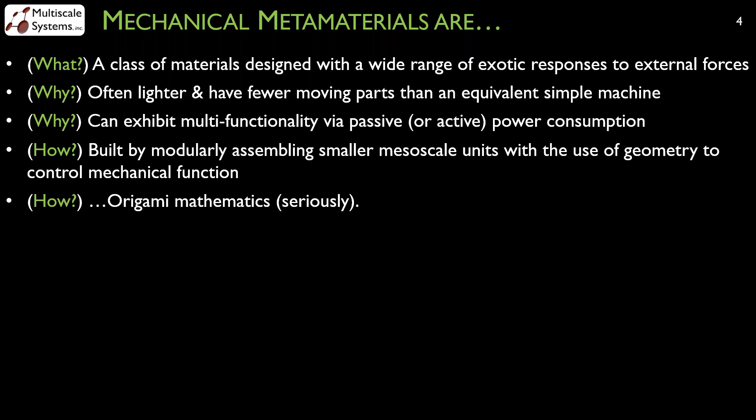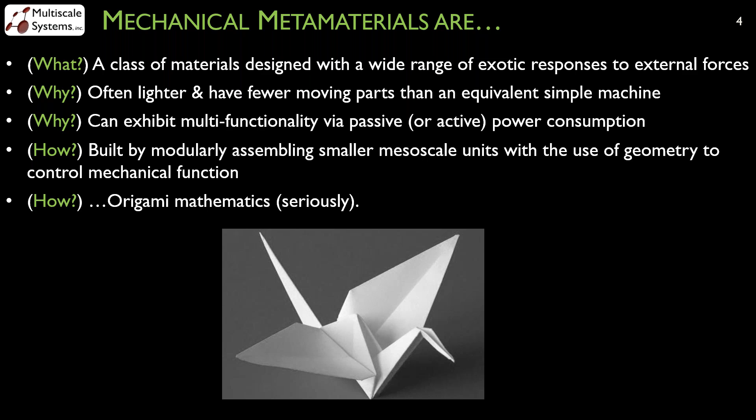Origami art like this is actually possible today because in the 80s and 90s, a group of mathematicians, computer scientists, and physicists took an interest in the mathematics of origami and developed tools to enhance its design. That community also helped lay down the foundations and the tools for being able to probe how origami can be used to control the mechanical function of folded sheets.

And this is a really nice entry point into the world of origami as a mathematical object and a building block for materials, because this simple design is incredibly rich with technical insights.

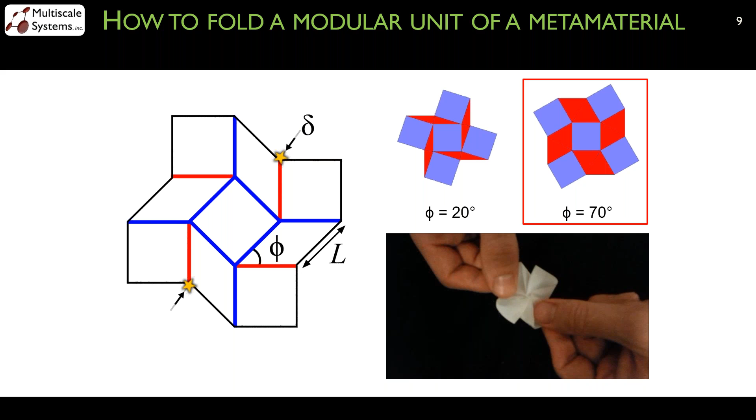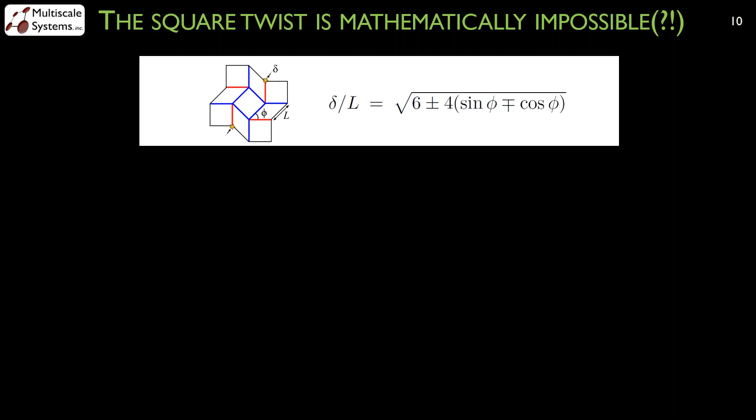Mathematically, there's a really bizarre mystery that shows up as soon as you start to try and analyze this, and it turns out that mathematically this thing is impossible, that it shouldn't exist. So I've written down a formula here. I don't expect that it'll mean a lot, but basically it comes down to this. You can calculate what this square twist should be as you vary one of the parameters.

The reason is that geometry of a crease pattern isn't the only thing that matters if you care about origami. Specifically, let me pause this video. You can play it again. So here you can see that square twist. I paused it, and you can see that right here, the paper is bending. And bending paper does not show up in the geometry of the folding pattern, but it does show up as a property of the paper.

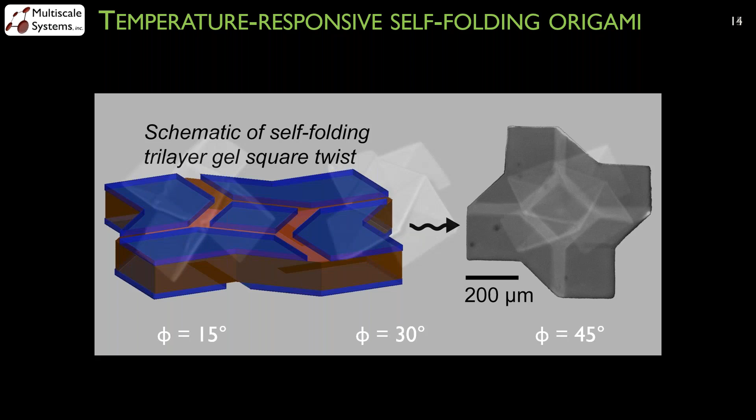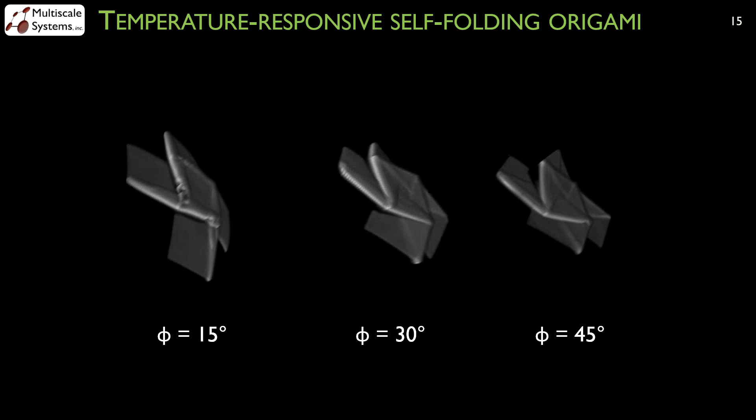So the tip of a ballpoint pen is the size of this origami structure. What I'm showing you here is that we took those self-folding structures with different angles, just like the paper ones I showed you on the previous slides. We put them on a microscope and we did three-dimensional imaging of them just to make sure that these microscopic structures were doing what we think they should be doing. And then we did the measurements.

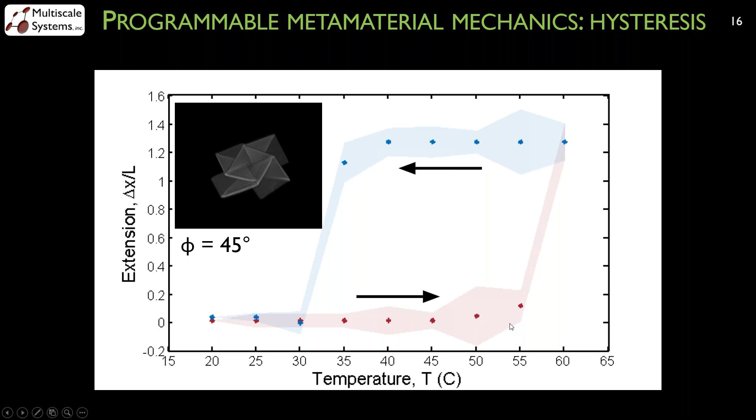So I don't want to spend a lot of time going on what the specifics of this are, but essentially in this experiment, instead of pulling on it with a force, we heat it up, and the heating gives this curve, this red band, that as you heat it up and up and up, it stays kind of folded and folded and folded, and then it hits a critical temperature and pop, the thing unfolds. Then we cool it down, and as it cools down, down, down, snap, it folds back up.

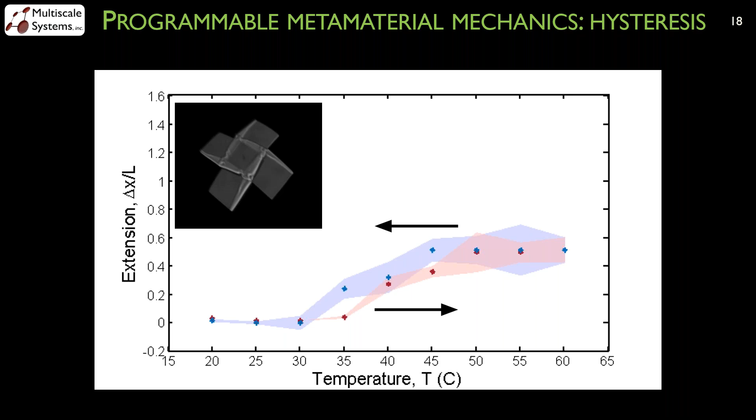We can vary the angle just like we did before, and we can change the amount of that popping action, the size of that loop. And we can put all the data together. And what matters here is that our hypothesis ends up being confirmed. That yes, in fact, we do understand the interplay between the geometry that we've embedded in the material and the properties of the material itself.

And when you sit back and you stare at a blank wall for the better part of a day, what you realize, the lesson that comes out of this is that size doesn't matter. That if you're going to use geometry to make mechanical metamaterials, you can make them microscopically small, or you can make them as big as a solar panel on a space station. And at the end of the day, geometry does not care. It does not care. That as you go up and down in scale, you can engineer the metamaterial properties independent of what size of the structure you're working on.

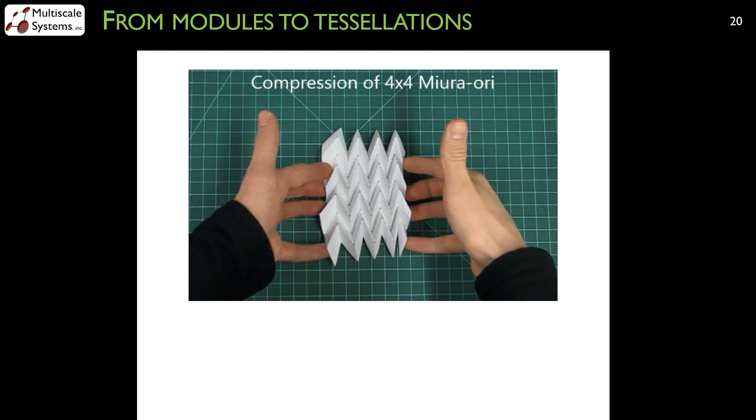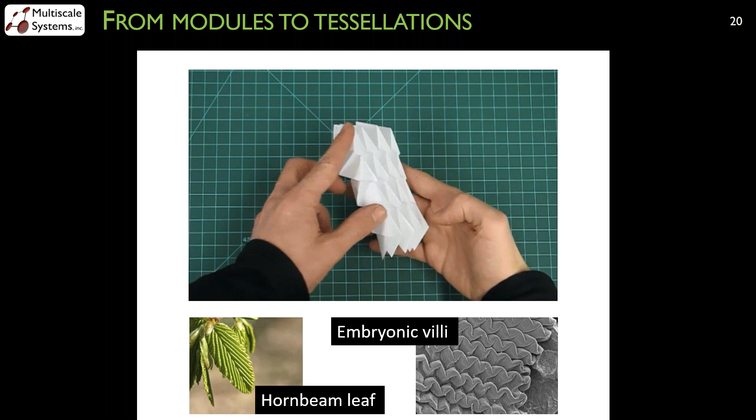So that ends up being important because it's not sufficient to just do one structure. At the end of the day, you want to start doing tessellations, because tessellations give you sheets, and sheets become the building blocks of other structures, other materials. So here what I'm showing you in this video is a pattern. This pattern is called the Miura-Ori. It was invented by a Japanese astrophysicist who was also an origami artist. And he invented this pattern as a way to compactly fold up solar panels to put them up into space for satellites.

The pattern itself is inspired by patterns that we see in nature on leaves, or in this case, embryonic villi, which is just a nice way to say the inside of your intestines as you are going through development. So this microscopic image here is actually the inside of an embryonic intestine. But nevertheless, again, that pattern shows up everywhere. And again, geometry doesn't care about size.

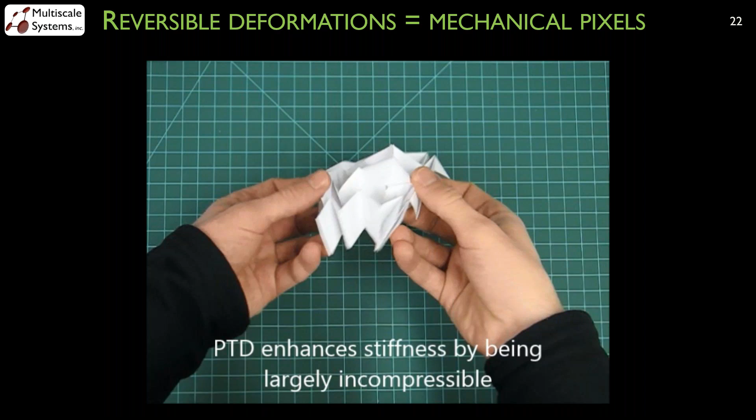One of the really surprising things that comes out of this is that you can make one of these patterns, fabricate the sample, and then you can start to actually modify or augment its properties even after it's been created. So here what I've done is I popped one of the units, I've inverted it, and now when I try to squeeze it, you see that it does not collapse all the way anymore. So by introducing one of those, what we call pop-through defects or PTDs, that allows us to enhance the stiffness of this material as if it was a sort of mechanical pixel. Not only that, the introduction of these mechanical pixels is reversible. So you can add them and you can remove them.

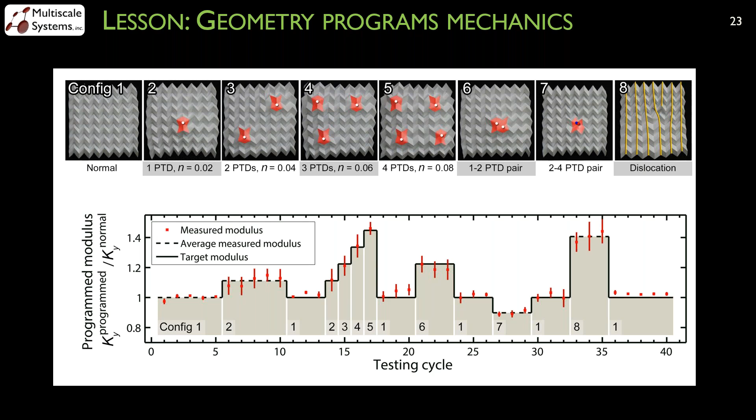So this basically ends up being sort of a capstone of when we go from exploratory science to rational design. And each one of these images here could be a 45-minute technical talk to an academic audience. But needless to say, we started off doing exploratory science, trying to understand this connection between geometry and mechanics.

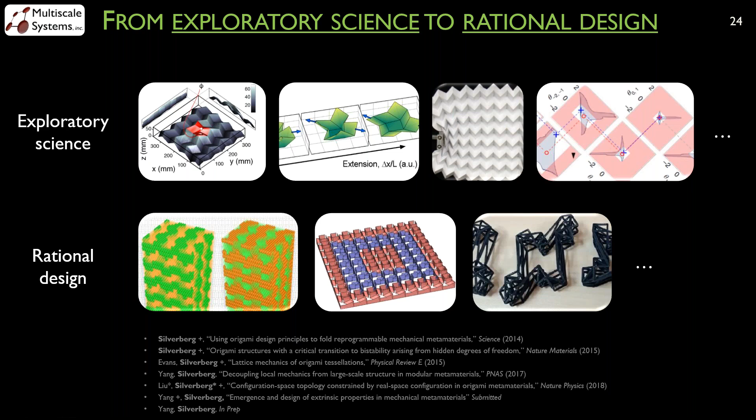We've been successful in there, and we've now gotten to the point where we can do computationally generated structured materials. These structures are three-dimensional. They're no longer just bare origami. There's a lot more technical sophistication that goes into the design, the validation, the fabrication of things like this.

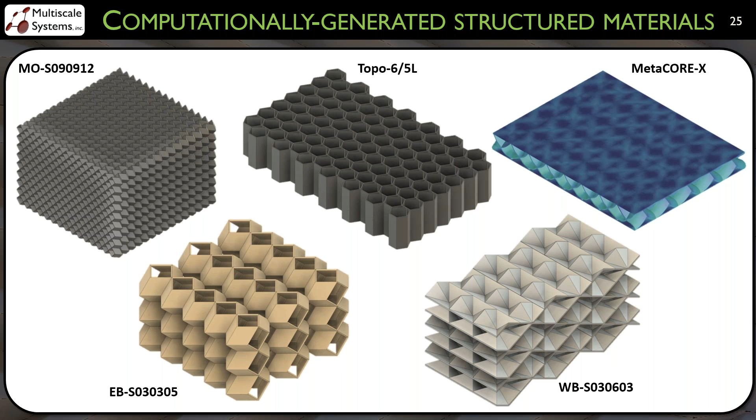But when I say these are mechanical metamaterials inspired by origami, I hope you can think all the way back to the origami crane at the roots of origami and just these basic individual units and poking and prodding them to understand how the crease pattern, how the geometry starts to affect the physical properties. And it's basically that game. It's that game of using geometry and playing with geometry that allows us to create these various product lines.

So this is where I started the technical portion. I'm going to end the technical portion here. I said again, we design and manufacture advanced structured materials. Conventional materials, I've showed you thin sheets like mylar or paper. I've showed you self-folding polymer gels. On the right, I've shown you polyurethanes, carbon fiber reinforced plastics. We've got metals. All of those are conventional materials that are already mass-produced and widely available.

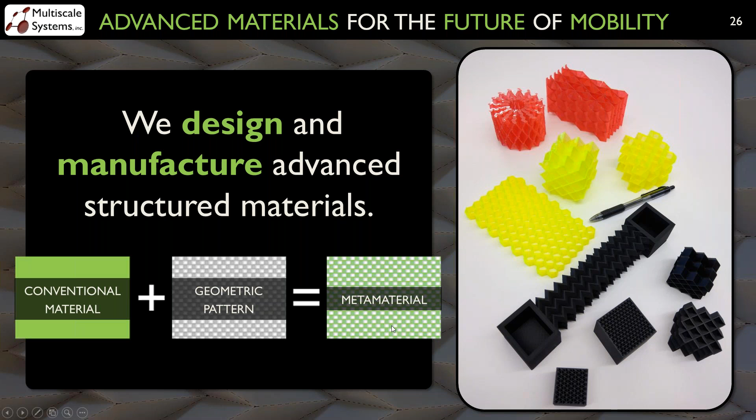Our value add, the way that we're able to introduce new and desirable properties into materials, is through that geometric pattern. So using that origami-inspired design that has led us to all the engineering expertise and know-how, it allows us to get to that functional metamaterial. What does a functional metamaterial look like? What is the real need here? What does this end up being?

Well, I want to turn your attention now to a problem in the transportation sector. And I think this is where we start to interface more concretely with the MassCEC community, where we care about issues related to greenhouse gas emissions and harm reduction coming out of, for example, the transportation sector. In the US, the transportation sector is something like an $800, maybe $900 billion market. It produces a couple billion metric tons of CO2 per year. And a lot of that CO2 production is coming out of vehicles such as semi-trailers.

Semi-trailers, of course, are responsible for moving the goods and products that we consume, everything from the grocery store to the laptops that we're all sitting in front of, to the Amazon deliveries that have become part of our way of life in the quarantine era that we're in. About 30-ish years ago, these semi-trailers, these box trailers, like the picture I'm showing you here, were manufactured from sheet and post. It was basically a giant wooden box on wheels.

About 30 years ago, a new material came onto the market. It was a high-density polyethylene composite panel, a sandwich panel, if you will. I'm showing you on the left here a schematic. It's basically a stainless steel skin, outer layers wrapping this high-density polyethylene foam. And that was introduced as a lightweight composite panel.

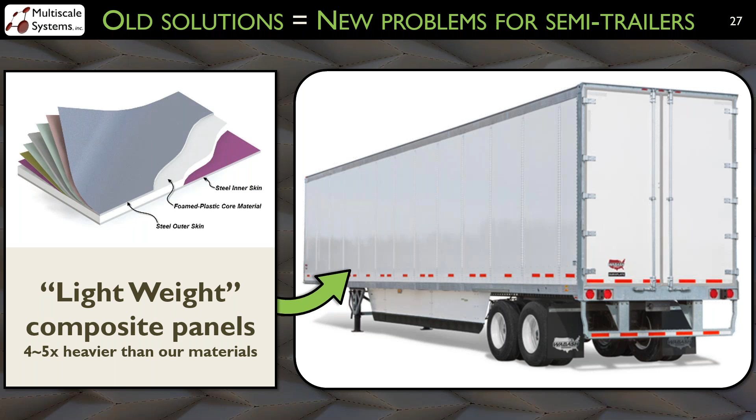What does this mean in terms of our market? Well, our beachhead market is the semi-trailer manufacturing. Again, 250 or so thousand new trailers per year. Those new trailers, 80% of them come from these 5 manufacturers: Wabash, Hyundai Translead, Great Dane, Utility Stoughton. And they're all manufacturing semi-trailers with this same type of composite panel materials.

We're in the process now of working with these companies to be able to identify what their pain points are and how we can transition our mechanical metamaterial as a lighter weight solution relative to the current high density polyethylene that they're using. If we can address the manufacturing concerns that have prevented other lightweight materials from being successful in the past, then we can provide better fuel savings, reduced emissions, and greater profitability for the people who buy the trailers from these manufacturers.

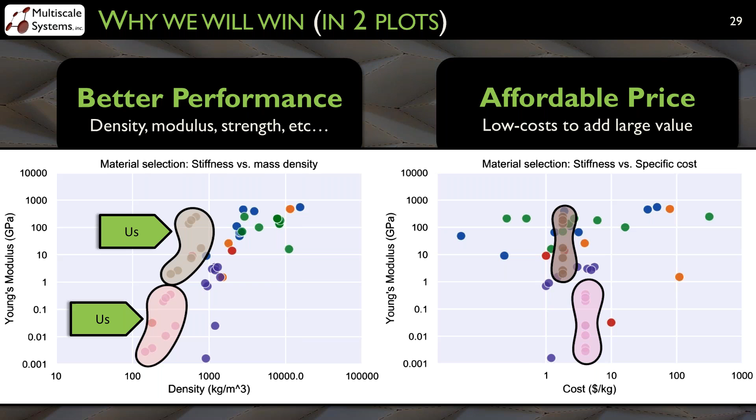Again, I think I mentioned when we started off that we celebrated our 2-year birthday yesterday. Looking back at the traction and revenues that we've had so far, we've basically had a stellar 2 years. We launched, we ended up getting our first few dollars through an Army-sponsored competition. It was $5,000. It allowed us to buy our first piece of fabrication and testing equipment.

From there into 2019, we had a great year with NSF and NASA sponsoring us through SBIR Phase 1s. Our NASA has now gone into a Phase 2 application. Our NSF is on that track and will be sent out soon. We joined the MassChallenge Accelerator to basically learn about how to do a startup.

Our approach to this is coming out of the technology, and we want to be a viable company. And so we entered into Mass Challenge as a way to try and get a boot camp on what it means to start a business.

In 2020, we have been funded by MassCEC, sponsors of this event here. We received a DOE SBIR. We joined the Lever Accelerator. We are now in the X-Tech 4.0 competition, and all of this is leading to something like about $700,000 of equity-free revenues that have really fueled our R&D, our growth, and our capabilities.

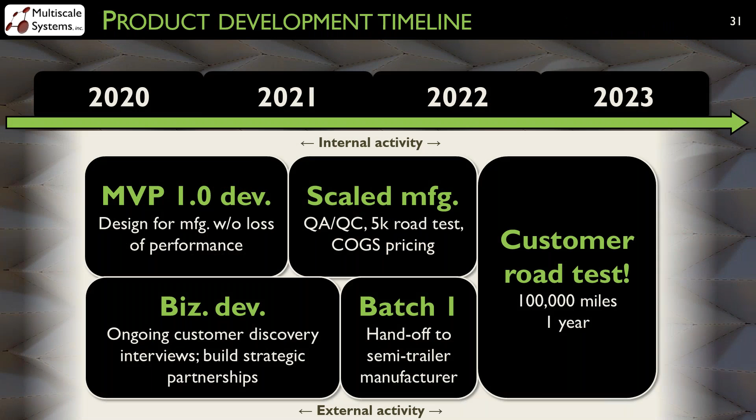And what we've learned in these companies is that there is a pretty clear distinction in terms of who holds the technical decision-making power, who holds the financial decision-making power, and what it is that they're looking for when they vet new materials. The fact that we're able to offer something lighter than what they're currently using does address the main overriding focus when they engineer the next generation of semi-trailers. But the reality is that in those conversations, we've sussed out a whole host of other challenges that prevented other solutions from being successful in the past.